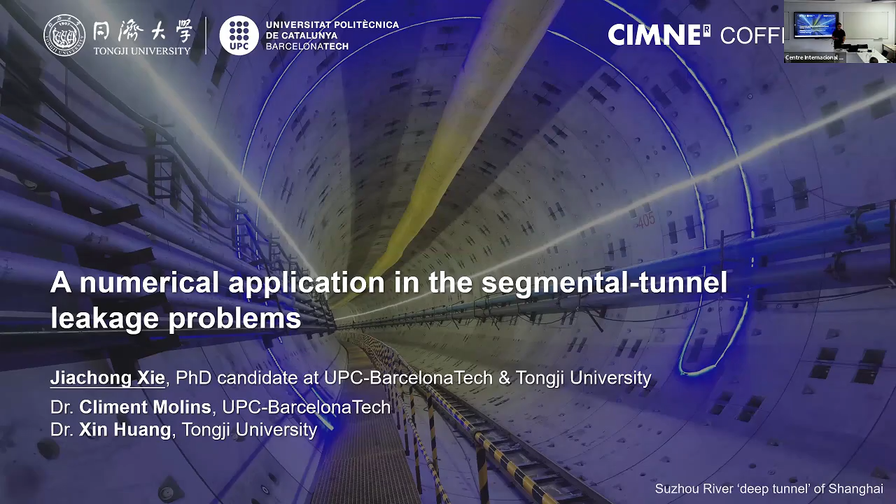So today I'm going to present to you my last chapter of my thesis, which is a numerical application in the segmental tunnel leakage problems, which is more related to CIMNE, but I have to be more about the numerical part.

So my presentation is going to be divided into 4 parts: research backgrounds, and then I will introduce a special case, a deep tunnel project in Shanghai, and then I will propose a numerical-based computational framework which allows us to assess the long-term leakage impacts. Finally, I'm going to share with you my interesting results in discussion.

At the beginning, I want to introduce this special tunnel type to you because you are not working with tunneling except for my professors. This type of tunnel, called segmental tunnel or shield tunnel, is a discontinuous underground structure composed of different rings and different segments, so that we have different joints, including longitudinal joints, circumferential joints, and T-joints. Since the stiffness and the water tightness of these joints are much lower than the concrete, reasonably, we have to pay more attention to these joints in the structural behavior and hydraulic behavior.

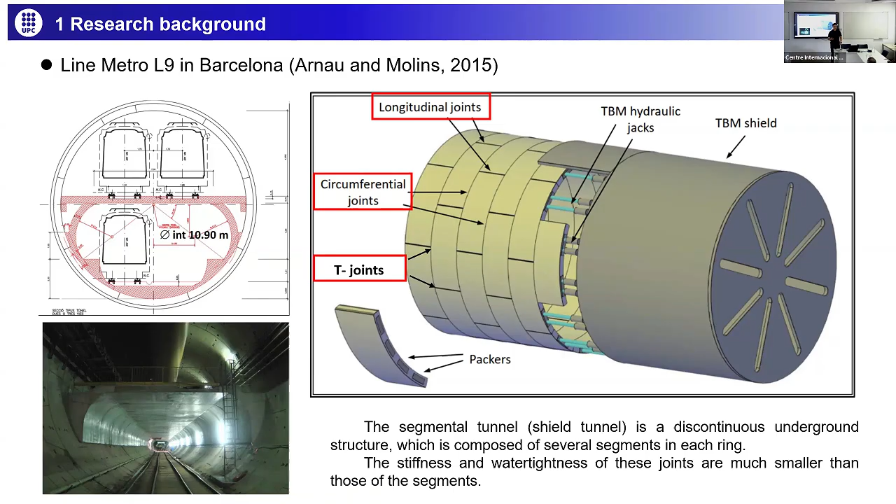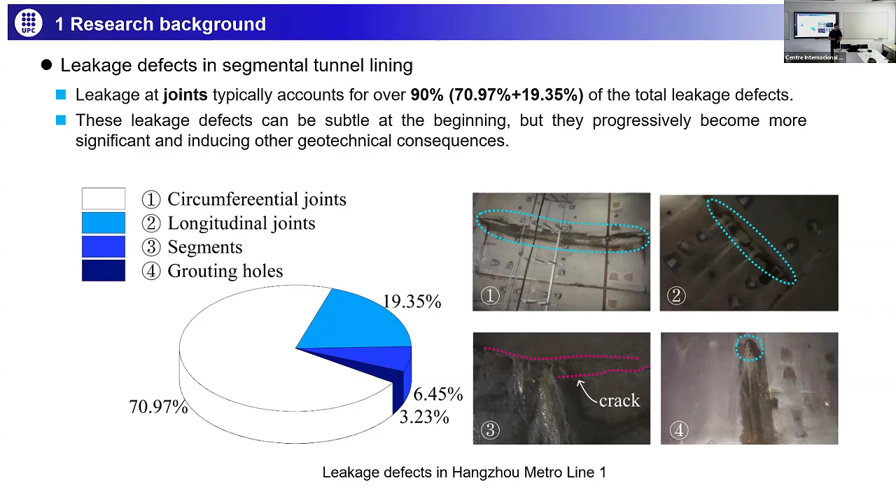The in-situ investigations also indicate that we have to pay more attention to the joints. Now I'm showing you the leakage defects in Hangzhou Metro Line 1. The results indicate that leakage at joints typically accounts for over 90% of the leakage defects. The results also imply that these leakage effects can be subtle at the beginning, but progressively become more significant and more unfavorable, causing other geotechnical consequences.

So these are some extreme geotechnical consequences. First, it can cause ground movement and landslide or sinkhole, which are extreme scenarios here. Furthermore, it can cause structural deterioration and failure on the segmental tunnel itself, for example lining cracks and failures, and sometimes super large dislocations at joints.

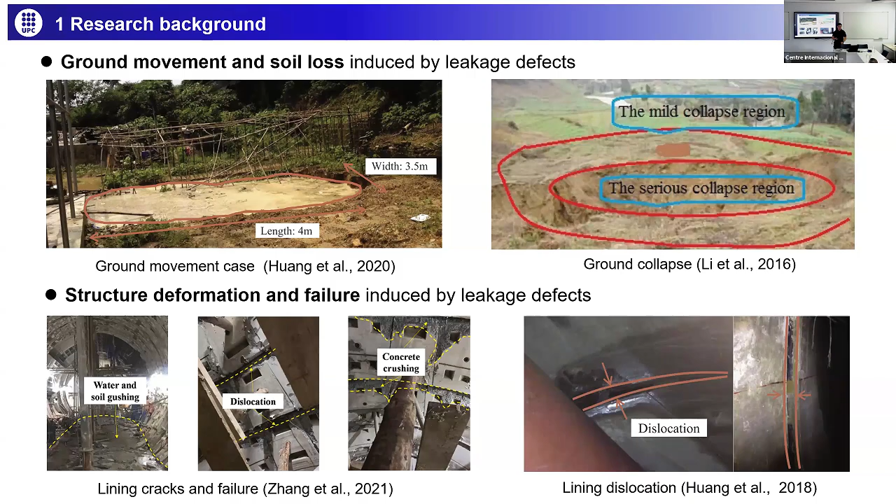Another fact is that the aforementioned leakage scenarios are all infiltration scenarios, which is groundwater inflow into the tunnel. But sometimes we have to consider the existence of internal water pressure in some tunnel cases, such as water conveyance, storage, and sewage tunnels. There could be a possibility of bidirectional leakage conditions, which include infiltration and exfiltration. So the bidirectional leakage-induced soil-tunnel interaction could be more complicated than a single-directional leakage scenario.

So in our study we have to focus on the sealant and leakage behavior affected by joint deformation and internal water pressure. We also want to explore the mechanical response of the tunnel-ground system subjected to infiltration and exfiltration.

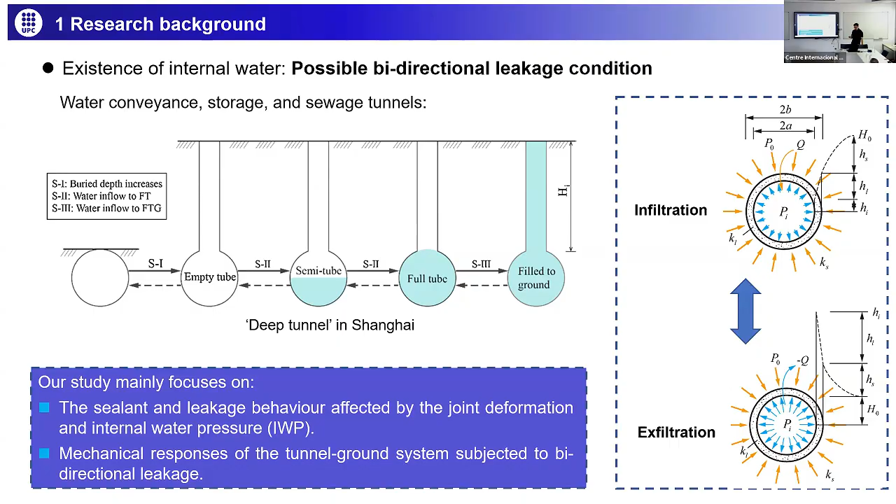Now I want to introduce this special case in Shanghai, which is supported by my supervisor in Shanghai, Professor Xin Huang. This deep tunnel is located in the Suzhou River in the city center of Shanghai, and you can see in the map it is exactly beneath the river. It was designed to mitigate the water logging and flooding scenario during heavy rain events.

In the geological profile, you can see that the buried depth is super deep, about 50 meters, and it was in the clay strata. This indicates that any leakage can cause significant structural response and ground response, including groundwater drawdown and ground reaction.

This tunnel was designed with a single lining to resist internal and external loads, which also indicates that the joint and the gasket are mainly the main waterproof system.

We also consider different scenarios of internal water pressure, including empty tube, full tube, and filling to the ground surface. In some cases there is water logging, so the water level is above the surface, which can cause an exfiltration scenario where the internal water pressure is super high.

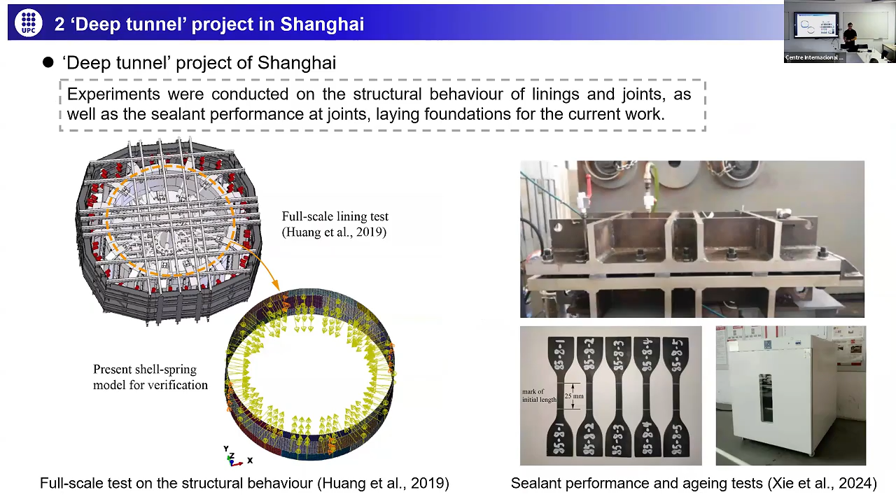We also conduct some experiments, including structural experiments and waterproof experiments, which lay the foundation for my calibration work for the numerical model. Now I propose my computational framework based on numerical modeling, which allows us to assess the long-term leakage impacts.

The most important mechanism I want to capture using the numerical model is the hydromechanical coupling behavior at the joints, not in the strata. The waterproof capacity of the joint is affected by joint deformation, but at the same time the joint behavior is also impacted by the soil-tunnel interaction induced by the leakage. So it's all coupled. This diagram shows the schematic.

At the beginning there is leakage behavior, which changes the seepage field and leakage boundaries. Over time it has consolidation behavior, which changes the ground reaction and soil-tunnel interaction. Finally there is tunnel deformation and joint deformation, and because of that there is a possibility it can cause hydraulic deterioration to the joint, which causes further leakage behavior. So this whole mechanism is coupled and dynamically changes over time during 100 years or 200 years.

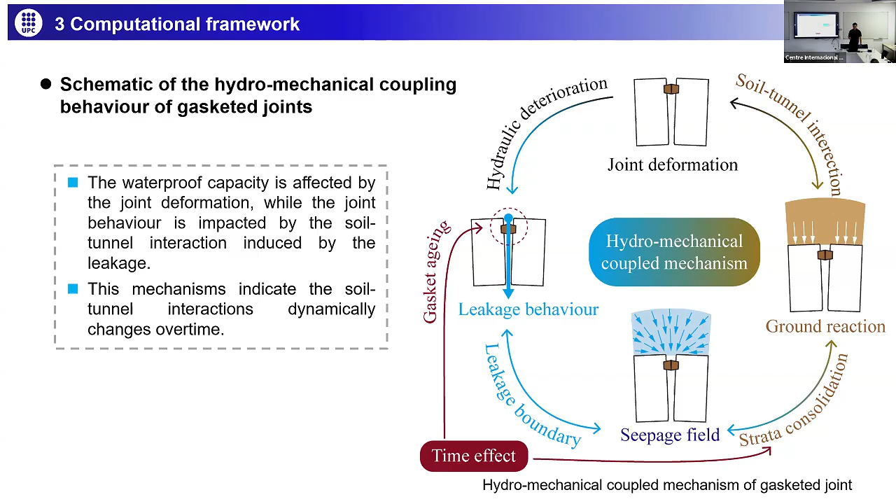So in my numerical model, how can I capture this coupling behavior? We proposed a numerical-based computational framework which enables iterative analysis by developing a user subroutine based on Abaqus. This diagram shows how I capture this coupling behavior.

In each step we have numerical results. Then using the numerical results we have the joint behavior information, including joint deformation and joint internal force. At the same time we have the groundwater pore pressure and the real time. Using this information we have the current water flow capacity of each joint, and using this we can calculate the leakage rate and put it into the leakage boundaries. Then we can conduct the next numerical steps. This is basically how I achieve this hydromechanical coupling behavior at the joints.

In the coding and programming, how can I determine the real-time sealant and leakage behavior of the joints using the joint deformation and joint internal force? Basically there are 3 steps to go.

The first step is to obtain the compression strain of the gaskets. Using the structural response obtained from the numerical results, we can determine the bending mode, whether it's positive or negative bending, and also we can find the rotation points using the neutral line. But sometimes the neutral line could be really huge, which is an extreme scenario, so the rotation point could be at the edge of the grooves or at the edge of the joint.

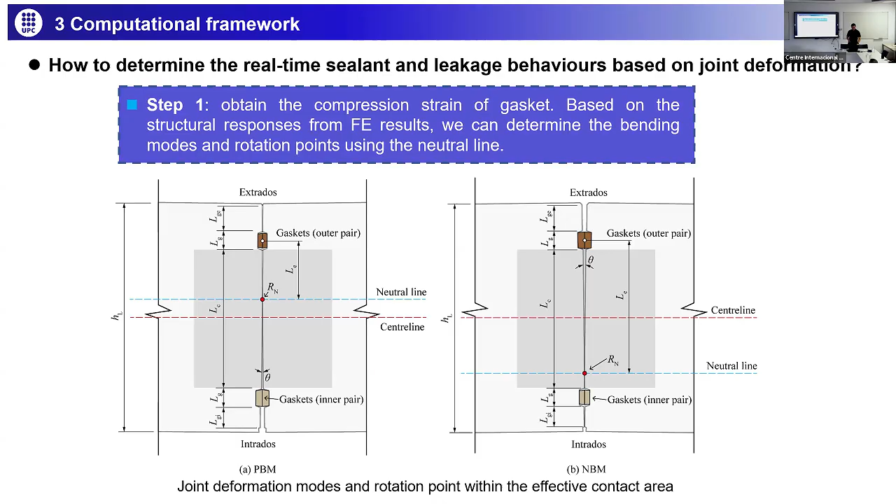Step 2 is to calculate the current waterproof capacity of each joint based on real time, which considers the aging behavior and the compression strain of the gaskets obtained in the last step, and we can determine if waterproof failure occurs. This 3-dimensional diagram shows the waterproof capacity decreasing over time and over openings, indicating that waterproof failure could be triggered by aging behavior and joint opening.

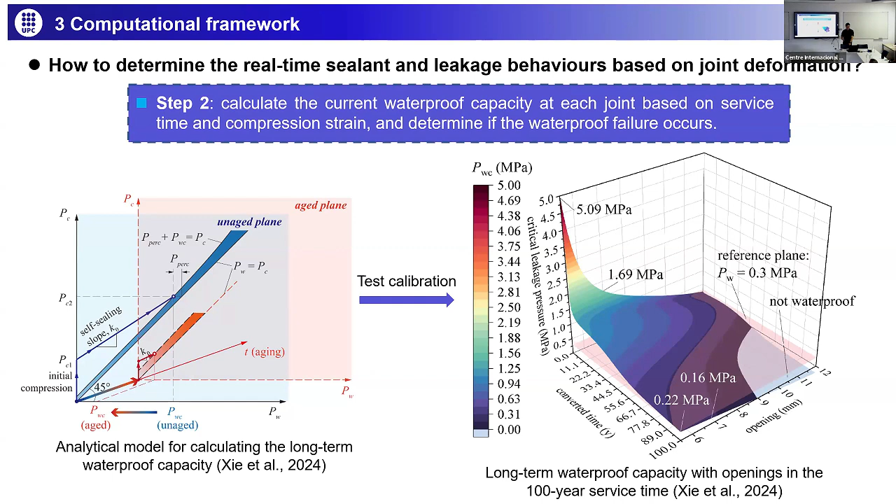The final step is to calculate the leakage rate. First we calculate the hydraulic gradient considering the internal water pressure, external water pressure, and waterproof capacity obtained from step 2. Then we calculate the leakage rate based on the cubic law, and finally we have the no-leakage scenario, infiltration scenario, and exfiltration scenario, which we put into the leakage boundaries.

Note that since we use the cubic law, we have to be careful about the hydraulic aperture, which should be really realistic to the real scenario. It should be really small, about micrometers.

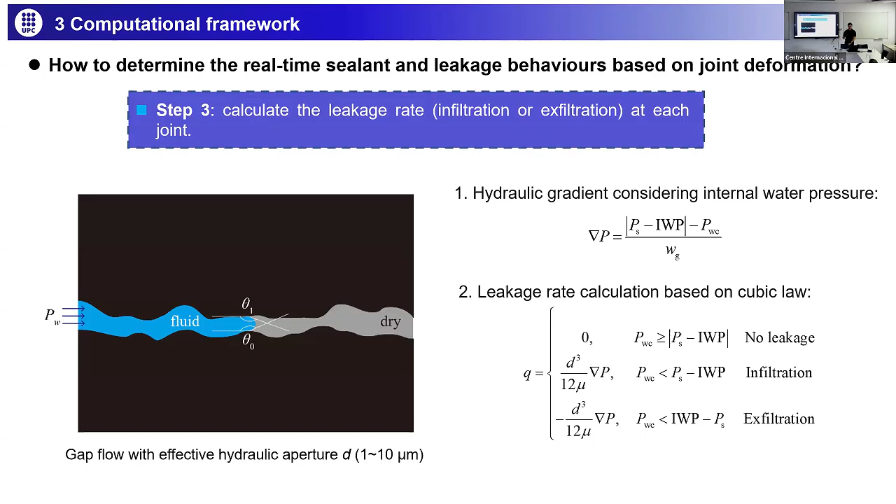Technically the framework can be used with any numerical models we have, but here I only propose 2 numerical models. The first is the one-ring model, which focuses on the transverse response caused by leakage at longitudinal joints. To capture the refined structural response, I use a shell-spring model, where here is shell and here is spring. I also consider different joint stiffness, obtained from test data.

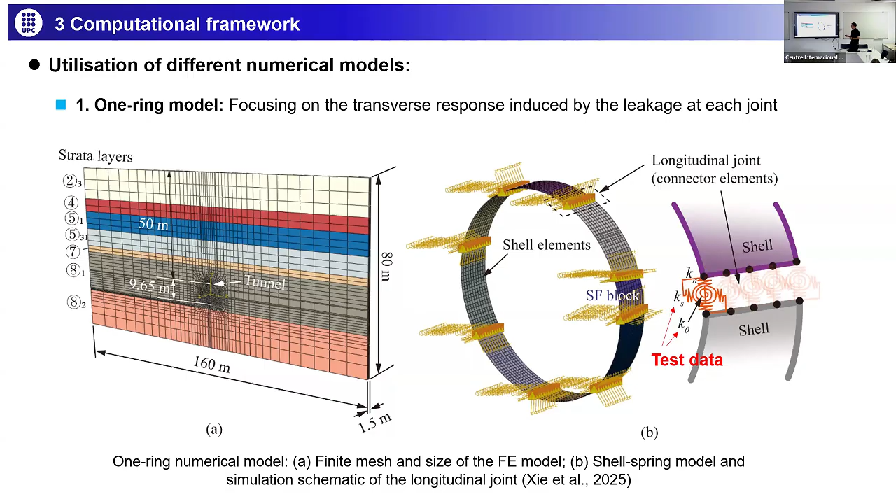So the next model, the second model, is a large-scale 3-dimensional model, which allows me to focus on the longitudinal direction response, where we have the leakage at central ring. The modeling technique is exactly the same as the previous model, but here I have an extra consideration of the circumferential joint, which allows the ring-to-ring connection.

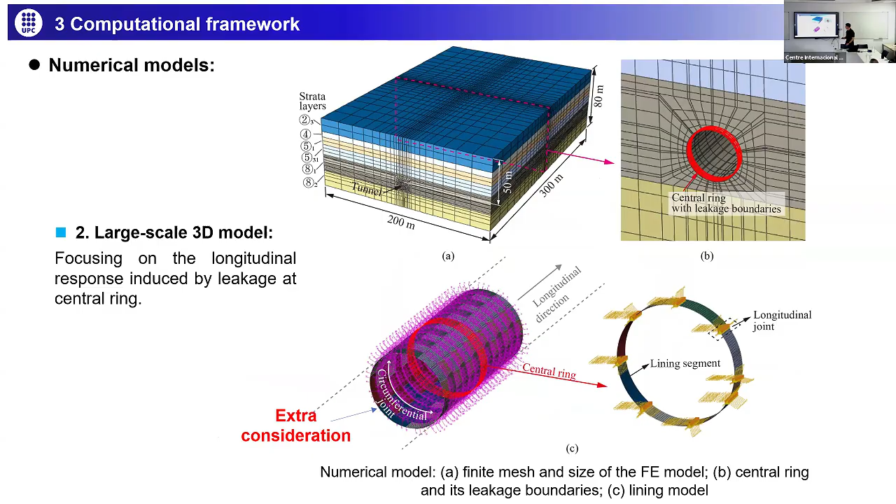Okay, finally, I can have some interesting results to share with you based on the numerical modelings. The first, which is most important, the results indicate the hydromechanical behavior of the joints.

So now I'm showing you the relative rotation of J7 and eccentricity of J7. And here we can observe that after 40 years, it changes because of waterproof failures. After that, the rotation increases, the eccentricity increases.

We also compare these results with the non-couple case, which is the dashed lines. In the non-couple case, the waterproof stage increases to 50 years with smaller structural response. This is a good result, it indicates we have to consider the hydromechanical behavior at the joints, because further rotation will cause further deterioration hydraulically.

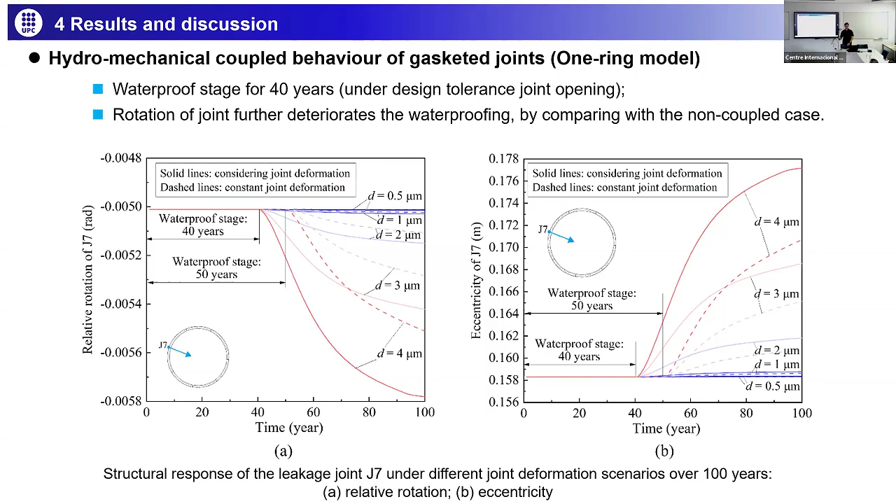And here is the structural response induced by single joint leakage. The results indicate that any single joint leakage can cause structural deterioration for the whole ring, and the joint opening has significant impact. For example, when the opening is 1 millimeter, there's no leakage at all, because it indicates good construction quality.

And in some unfavorable openings, the leakage can cause overall settlement up to 10 millimeters and a slight ovalization trend when the opening is 11 millimeters. This is all because of the consolidation of the strata.

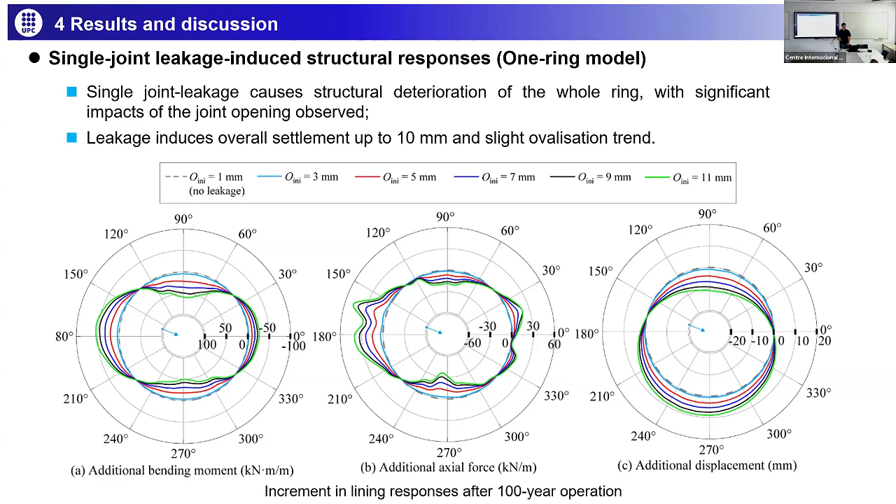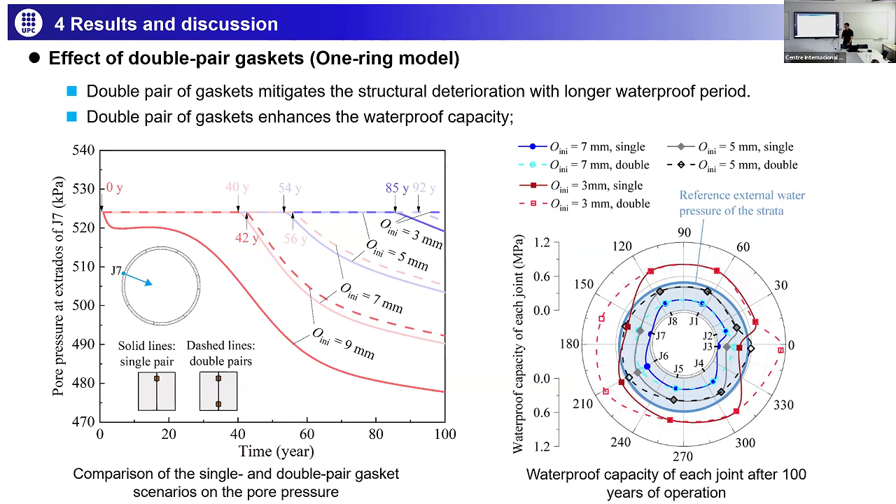We also analyze the impact of internal water pressure. Here I'm showing you the eccentricity of the joint and waterproof capacity of the joints. Since it's really easy to understand, when there is internal water pressure, the axial force of the lining decreases, which enlarges the eccentricity.

In some extreme scenarios of internal water pressure, the eccentricity could surpass the joint height, which is really unfavorable, but eventually the rotation point will be at the edge. Because the rotation point changes, it decreases the waterproof capacity, which is super significant.

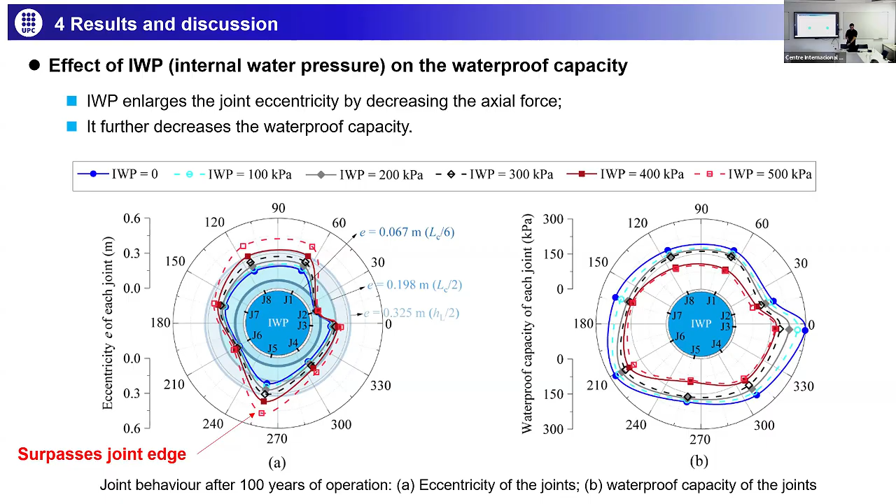Okay, here I'm showing you the seepage field of the strata impacted by the internal water pressure. So it's a seepage field over time and over internal water pressure.

So there are some conclusions. The infiltration can transform into exfiltration as internal water pressure increases. In some special scenarios, only small leakage occurs when internal water pressure is 500 kPa, because there is a balance between internal water pressure and external water pressure.

And furthermore, the leakage process is progressively increasing over time. This is mainly because of the gasket aging, but it can also be attributed to the hydromechanical coupling behavior.

Okay, so here for a 2D scenario, I'm using one figure to conclude all the mechanisms we mentioned, including the infiltration, the internal water pressure, and long-term leakage.

So in the white quadrant, there's no leakage, but it has an ovalization because unfortunately there is a tunnel effect. So we have certain rotation at the joints, and over the long term after infiltration, the ovalization increases because of the consolidation and so many mechanisms in the strata. We can observe the increasing in the joint.

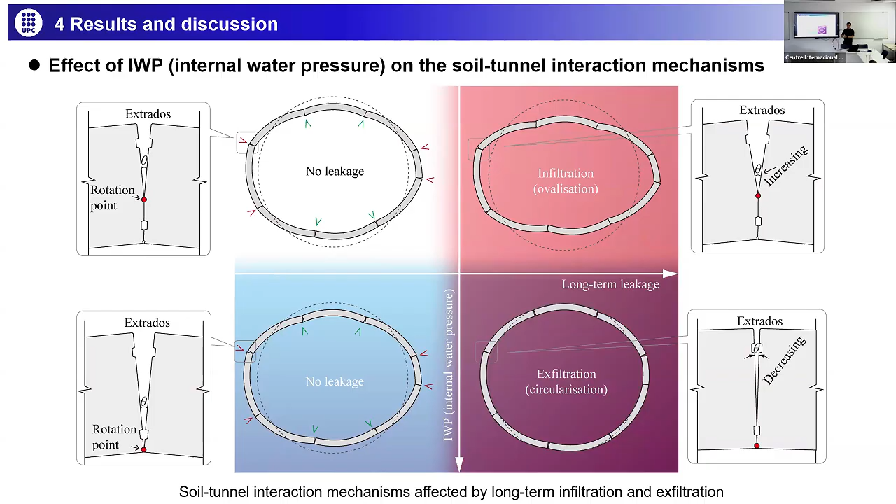In addition to the two-dimensional scenario, we also consider the three-dimensional scenario. This is more complicated because we have to consider the longitudinal settlements, which can induce further leakage due to ring-to-ring connection, and furthermore the consolidation is localizedly distributed in the longitudinal direction. This is a more realistic case, but the two-dimensional scenario is more unfavorable because it imagines there's no difference in the longitudinal direction.

So I'm only briefly showing some results of the three-dimensional model. Here is the settlement increments and longitudinal force.

There are some conclusions. The first is the settlement trough can turn into a heave when infiltration transforms into exfiltration, and this is because the consolidation behavior transforms into unloading behavior at the strata.

Second, the settlement trough has an approximate width of 300 meters. This is crazy because there's only one ring that has leakage, but the impact is super widely distributed.

Finally, the infiltration and exfiltration induces opposite longitudinal force, which indicates downward bending or upward bending.

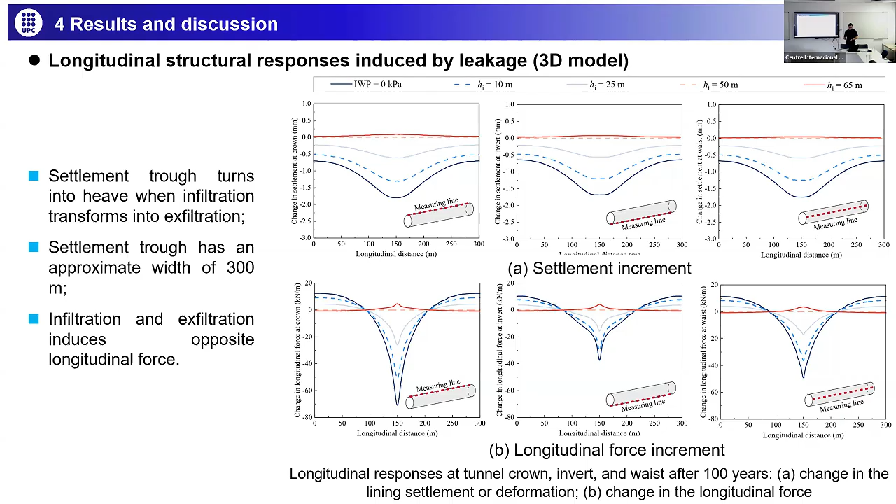Based on the numerical model I proposed, I think there can be more future work. First, I think we can implement more sophisticated theories into the framework to capture more realistic situations, such as nonlinear rotation behavior of the joints and enhancement of double pair gaskets, how it enhances the waterproof capacity more sophisticatedly. Second, I think the framework can be extended to more extreme scenarios, such as excavation or uploading, surface loading.

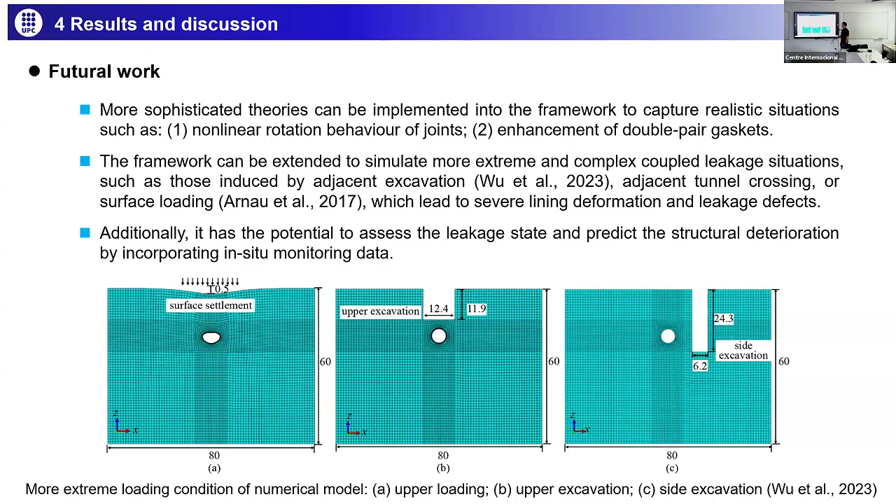Finally, I think it has potential to assess the leakage state using in-situ monitoring data. Thank you, that's all my presentation. Please share your comments with me or other ideas. Thank you.

Share your comments with me. But you are a geotechnical engineer. Yeah, but the tunneling, I don't have any idea. Oh, imagine it as a pipeline.

I have a question, but it's not numerical, it's more from the practice point of view. When you have a lot of problems inside a tunnel, after 100 years, say you have a significant water table.

If you have a significant problem regarding leakage, what can you do? I think the real situation could be like: when there is leakage, we fix it. How do you fix it? Some grouting, cement, or just replace the segment with a steel plate segment.

So very localized intervention, do you think? Yeah, because if you are grouting, introducing some grout in the part of the joints that are leaking, or outside - sometimes they introduce grouting outside to make a larger barrier for the leakage.

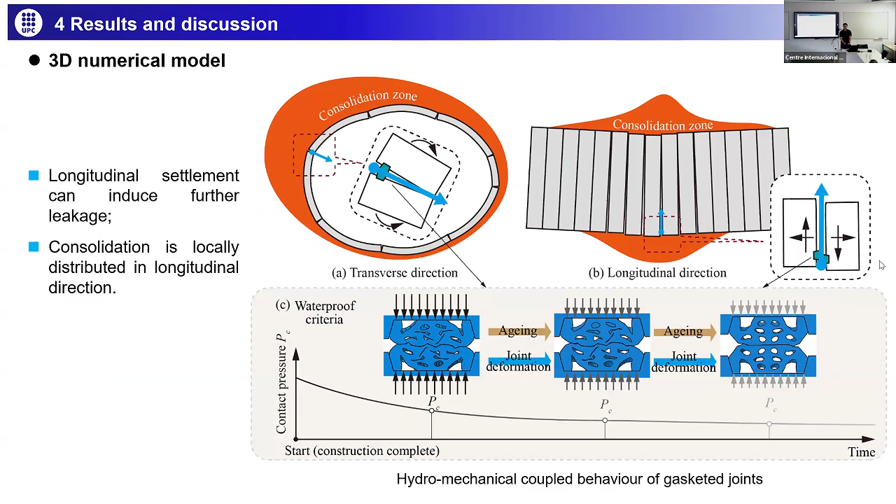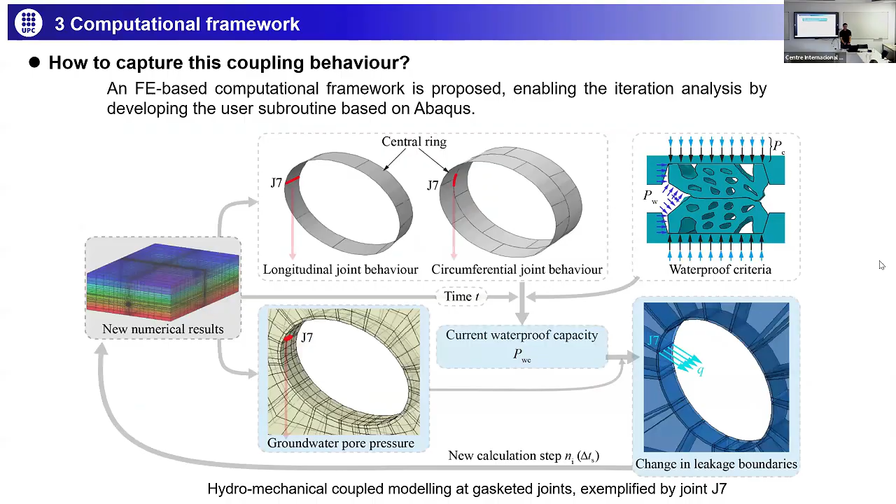If I remember, you did the modeling in silty clay. Yes, this was in silty clay. Then with the metro line, it's not always in the same layer - maybe, for example, clay, silty clay, or silt. So the rate of water leakage is different in each layer - did you consider it or not? No. In Shanghai the subsoil and clay is super thick. I can promise there's always clay, but it could be different clay - not like in Barcelona where it could be different, like rock and clay. But in Shanghai it's a consistent clay, like 50 meters, I think, to 6 meters deep per layer.

Thank you for that. But in the metro line, because the layers of the ground are different and they're changing, if you cannot maintain the line in the same layer, the water leakage can be different - sometimes higher, sometimes lower. But using the same material it can be different from place to place. Sometimes I analyze when there is rock behind, and the seepage field distribution is totally different. But in this case, only clay strata, so there's no really big difference using different clay.

Thank you for the geotechnical insights. Please, I know nothing about this subject, so I'm asking.

In this map, you have the subway tunnel that touches, maybe is very close to a river - it's on the river, beneath the river. So the leakage is caused by heavy rains, right? Does the river have any effect? The river actually has effects. But in my point of view, I'm only considering the gasket. Technically, from in-situ investigations, when the tunnel is close to the river or under the river, the leakage effect is much more significant. But super deep, like 50 meters, I don't know if there's any impact from the river. Could be - there is sufficient water supplement from the river.

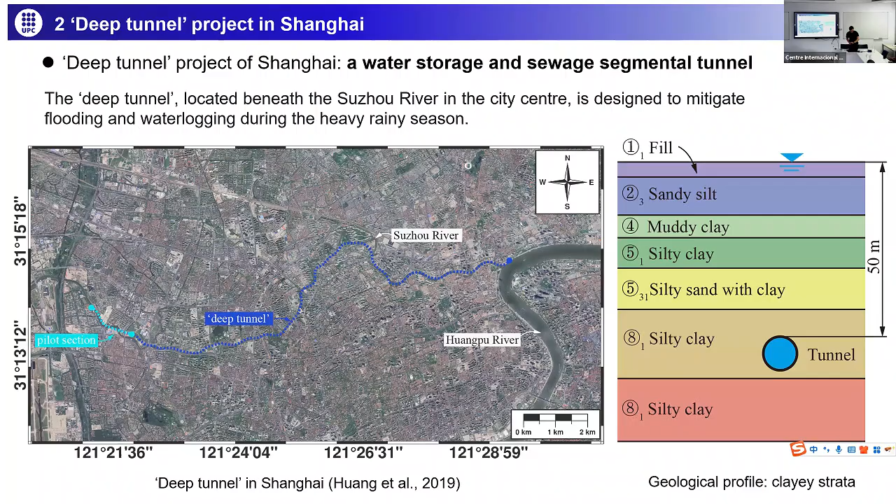Okay, any comments from my online professor? Can you hear me? Okay, wait, there's a group chat - oh, that's from me. Okay, thank you, thank you for participating. And you. What time is it? Thank you, Jiachong. Thank you, Professor. Thank you, my friends.